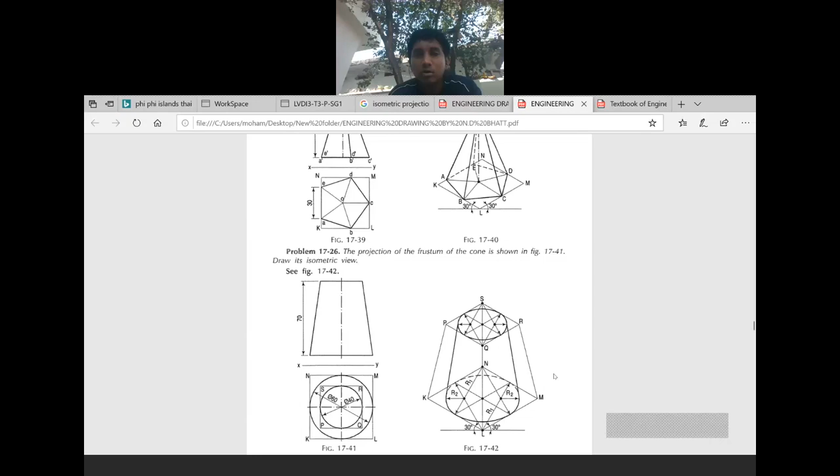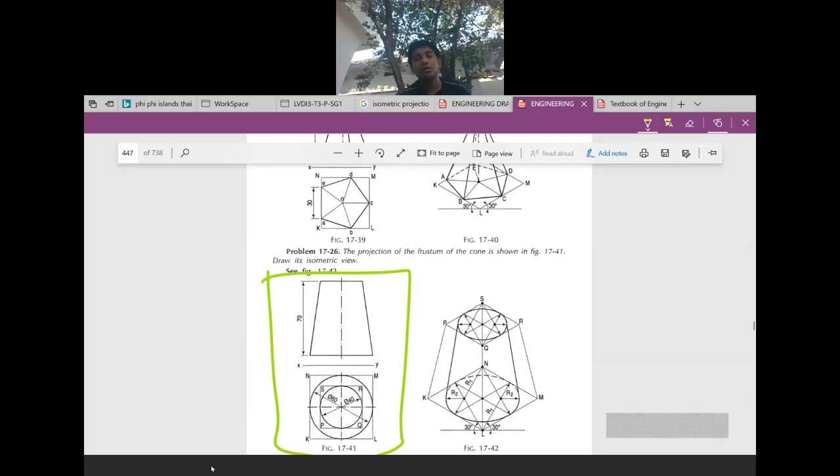Okay, here he has given a frustum of a cone. He has given the top diameter as 40, bottom diameter as 60 and height as 70 mm. Here you are going to draw the frustum of a cone. He has given the dimensions in this diagram. By seeing this diagram, you have to draw the isometric projection of this frustum of a cone. Top diameter 40, bottom diameter 60, height 70. How do you draw this one? Just see here.

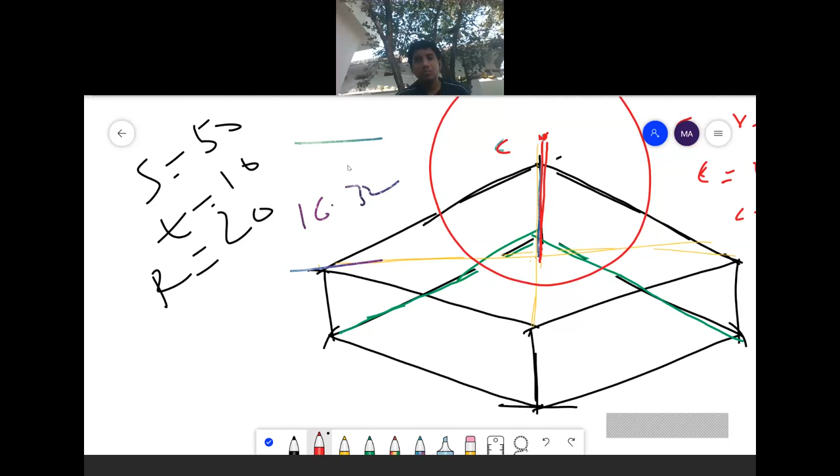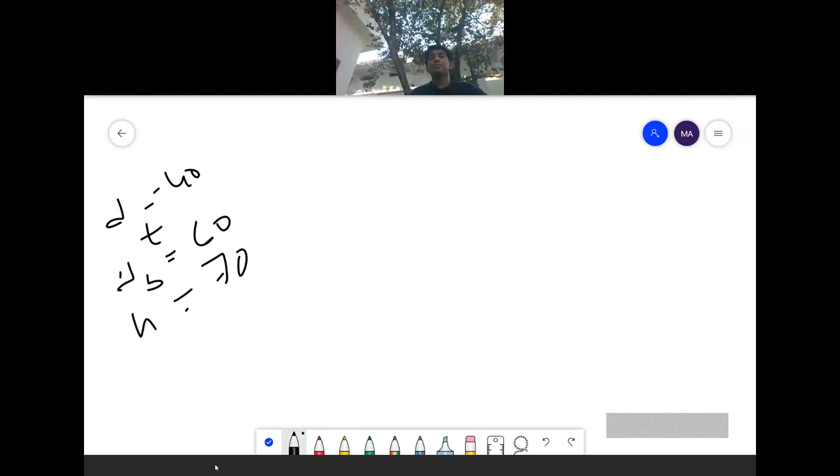So here he has given top diameter as 40, bottom diameter as 60 and height as 70. Bottom diameter as 60, height as 70. Understand? Given height as 70. So first you will consider

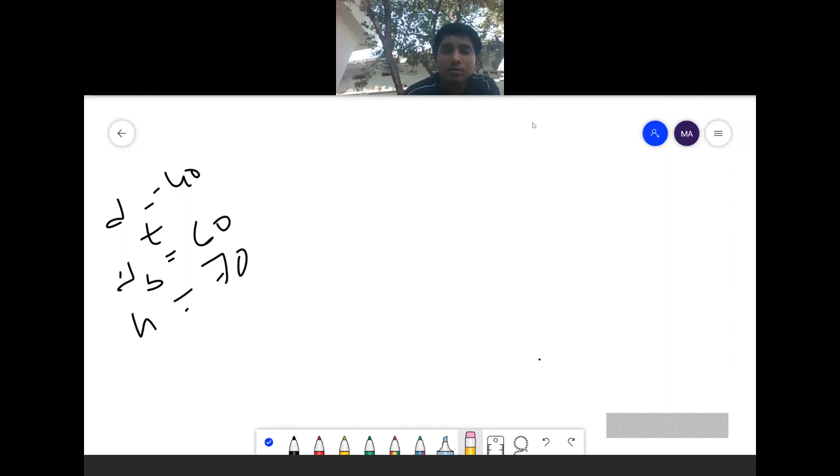you will draw 30 degrees this side, 30 degrees this side, and you'll cut 60 here, 60 here. From here we'll cut 60, 60. Join this one. You form a square with 60 mm. Then you'll mark the center points here, 30, 30, 30 here, 30 here, and 30 here. Then you are joining these two from the top vertex and similarly from the bottom vertex. Then you are drawing the circle.

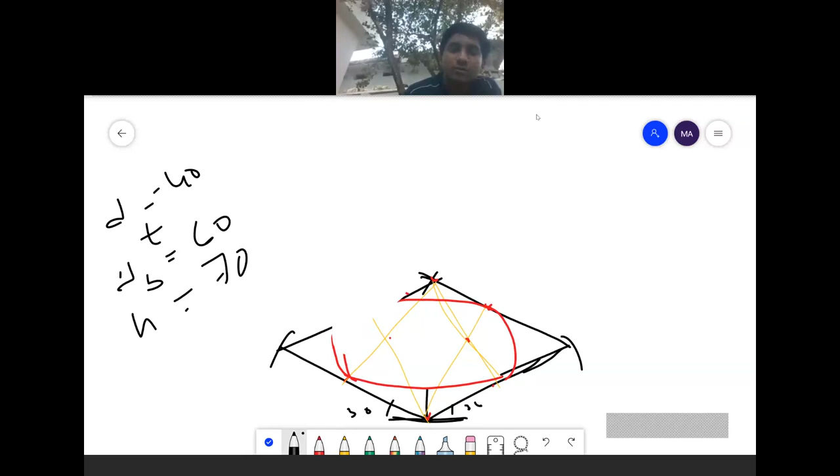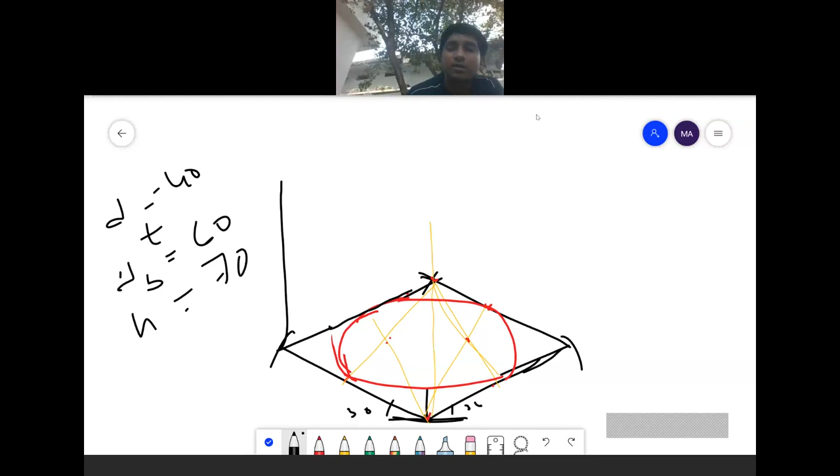You are taking this as center, this as a radius. You are drawing one circle. This as a center, this as a radius. This as a center, this as a radius. This as a center, this as a radius. Draw the circle. Okay, this as a center, this as a radius. Draw one circle. It will form a circle. After that, the given height is 70 mm. So we will extend this one to 70, this to 70.

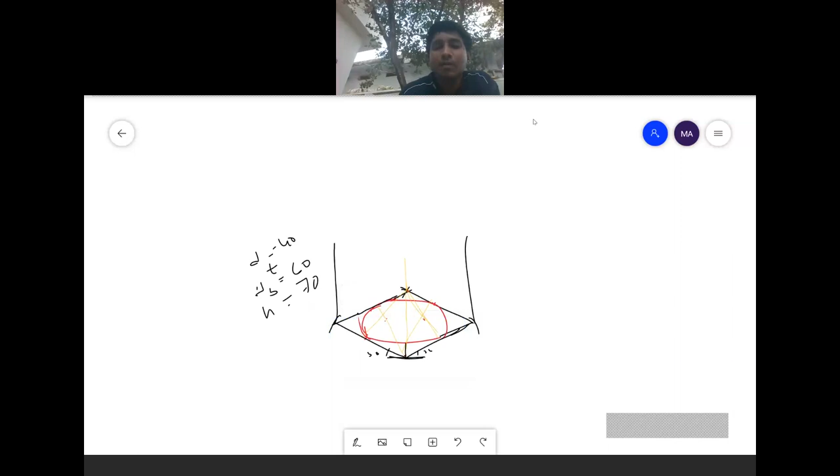Okay, then we'll extend this to 70.

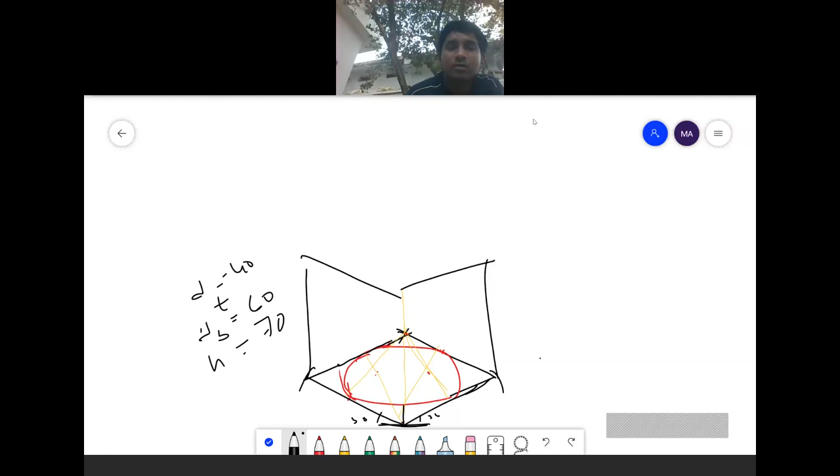Okay, then using this one, join this one and this one at this point, and from here also you will extend 70. Then you'll join this one and this one. It will form a square again. After that, how do you reduce this one? Here he has given a top diameter as 40. Understand? Here the bottom base diameter 60 you have drawn, top diameter is 40. You have to reduce this 60 square to 40 square.

For that, you mark the midpoints. First, you will mark the midpoints here. Join this midpoint and this midpoint. After that, the total distance here is how much? 60. 60 minus 40 is 20. 20 by 2 is 10. Understand? You will reduce 10 mm here, 10 mm here, 10 mm here, 10 mm here, and you will draw one line like this, one line like this, one line like this, one line like this.

Get another square. We'll draw with another pen. This one is the square we have. Understand? We are reducing this 60 square to 40 square. Now it is reduced to 40. After that, again you will use the 4 center method. You have centers here. Join this one. After that, you'll take this as center, this as radius arc, this as center, this as radius arc, this as center, this as radius arc, this as center, this as radius arc. Then you will join these two. This will be your frustum of a cone. Understand?

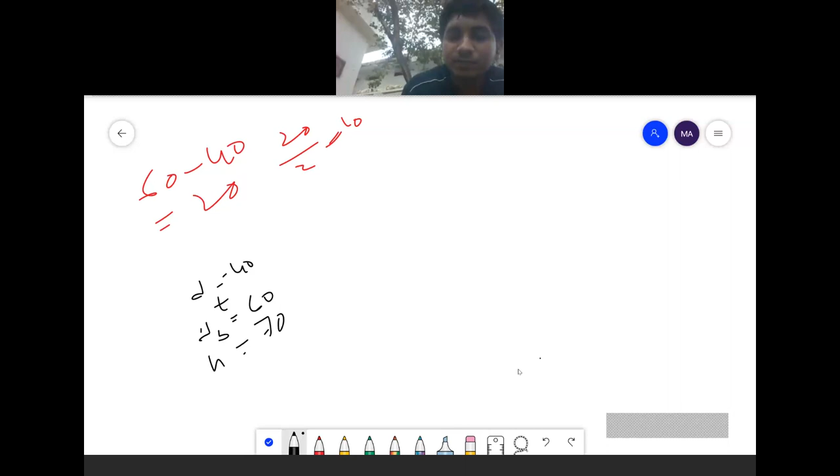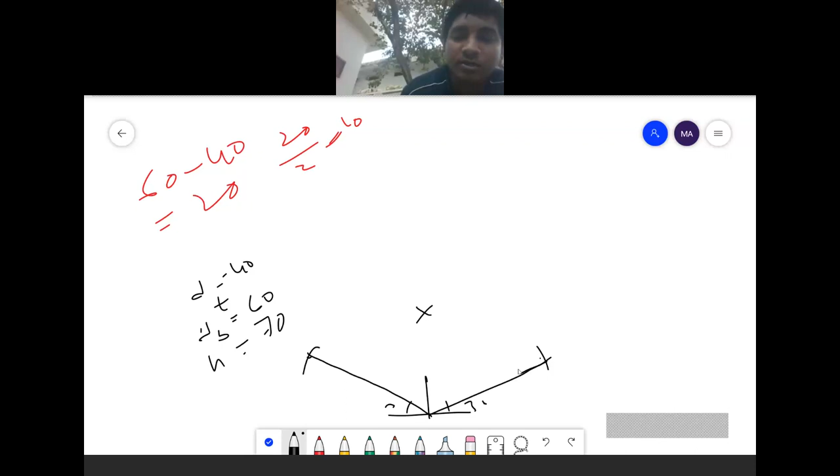drawn 30 degrees this side, 30 degrees this side. Then I have cut this side 60. I have drawn here 60. From here I am cutting 60. From here I am cutting 60. It will form a square. Then after that I am marking the midpoints at 30 mm. The midpoint of 60 is 30.

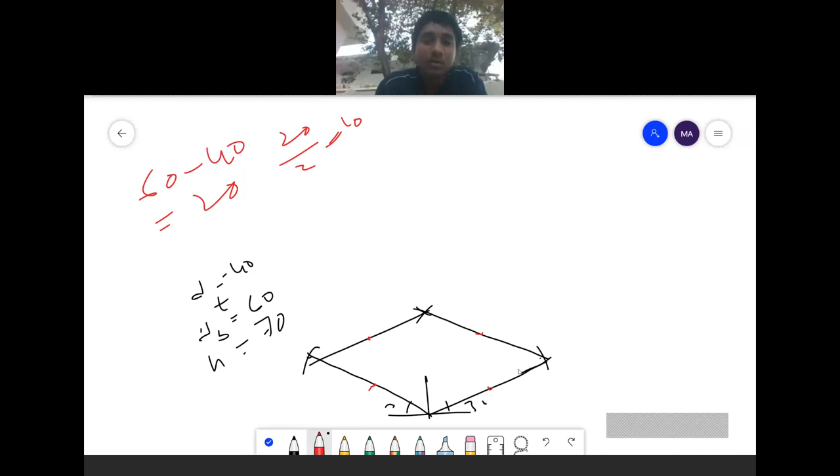After that I am joining from the top vertex to these bottom midpoints, and the bottom vertex to these midpoints. After that, I am drawing the circle, taking this as center, this as radius, taking this as center, this as radius, taking this as center, this as radius, taking this as center, this as radius.

After that, I am projecting this to 70 mm. Okay, height is 70. I'm projecting this line to 70 mm. Okay, then we'll get a line here from this point. From this point, I'm joining this one and this one. Okay, this one and this one.

Then I am extending 70. Height is 70. From the top of the square also, I am extending 70. Understand? Then I am joining this one. It will form a square. After that, I will mark the midpoints: here one midpoint at 30, here one midpoint at 30, one midpoint at 30. After drawing this, I am joining this midpoint line and this midpoint line.

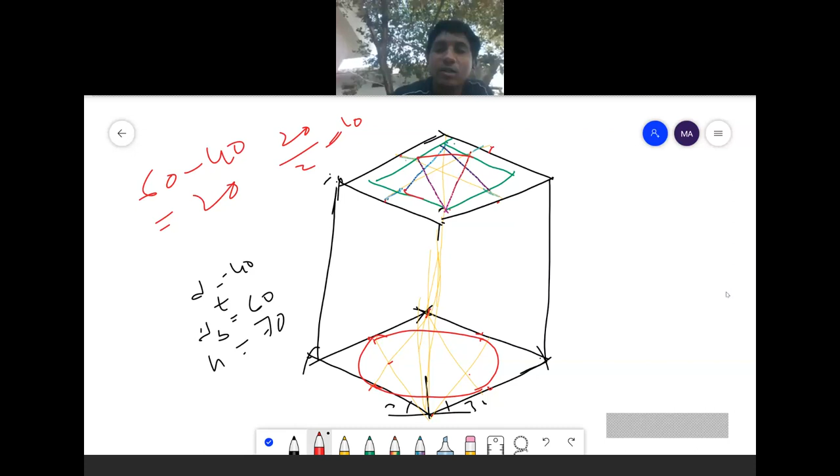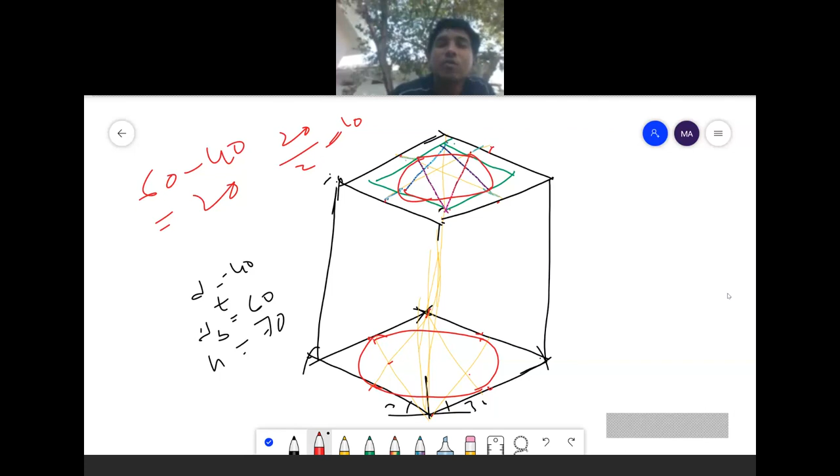It will form another square which is in green color. Then again you have midpoints for that square as well. So I am using the 4 center method to draw the circle, joining the top vertex to these lines and the bottom vertex to these lines. Again I am taking this as center, this as radius, drawing one arc, and the same for all four centers. It will form a circle, and I am joining these two circles.

This is the frustum of a cone. Understand? Just know how to reduce this one. You are subtracting how much distance you want. You have 60, you want 40 mm. So 60 minus 40 is 20. 20 mm you are reducing, so at two ends you are reducing 10 mm. At four sides marking 10 mm and joining all the lines. Then using the 4 center method, you are drawing the circle and joining the two circles.

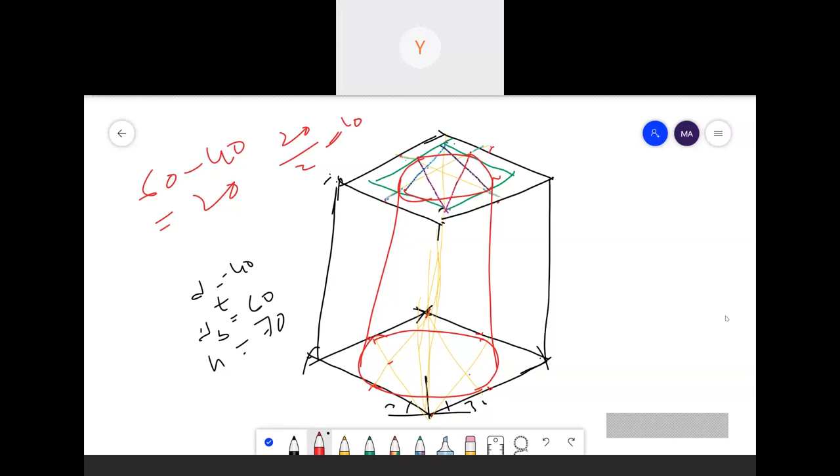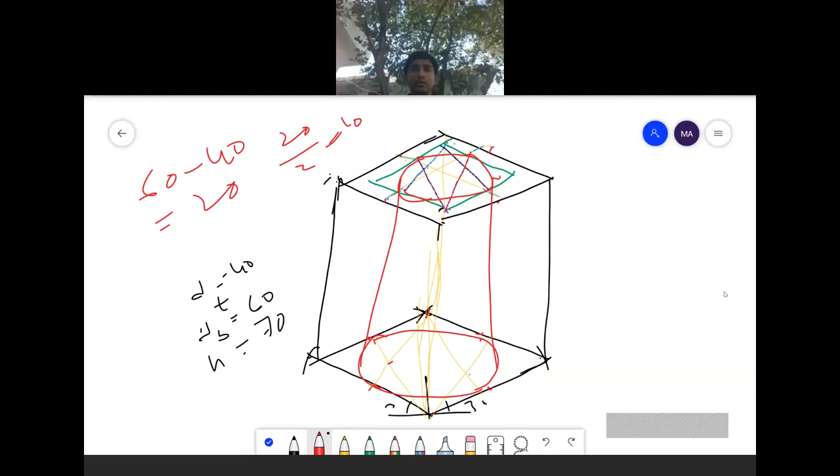Emma, do you have any doubts? No, sir. Okay, can we go to the next problem? Sir. Can we move to the next problem? Yes sir.

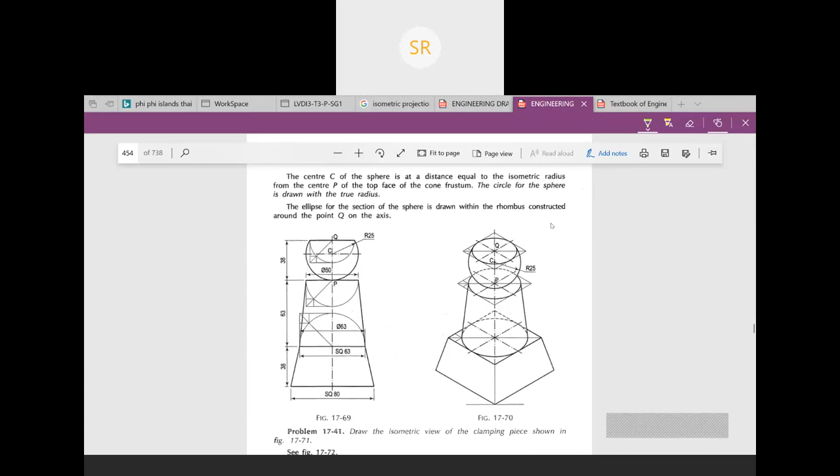Now next you are going to draw this one. The front view of three solids placed one above the other with their axis in a straight line is shown in a figure. Draw the isometric view of the arrangement. Here he has given a diagram like this. Here the side of the quadrilateral is 80. Here the side of a quadrilateral is 63 and height is 38.

And here the base diameter of this frustum of a cone is 63, height is 63, and top diameter is 50. The radius of this one is 25. Okay, and radius of this one is 25, and here it is a cut sphere at 38 mm. Understand, it is a cut sphere at 38 mm.

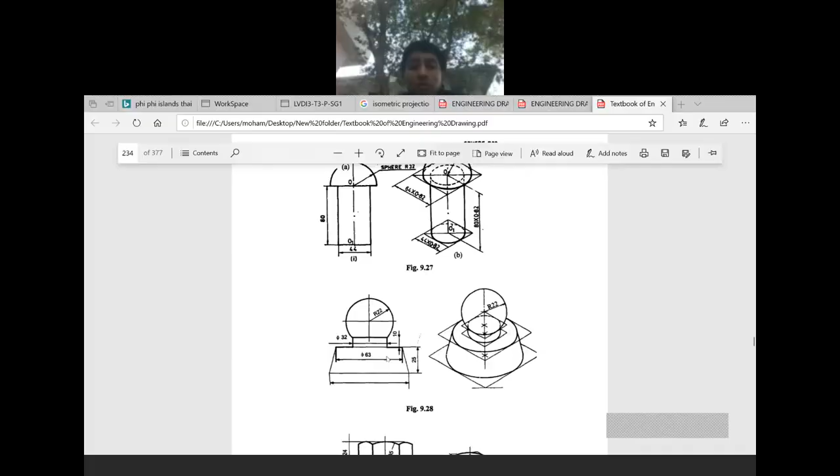Can we draw this one? Or else we will draw this one and then we will go to that problem. Here he has given one taper, one frustum of a cone whose top diameter is 63. Base diameter is not visible here. Take it as 80 mm, and height is 25, and here this circular plate diameter is 32, and this is 10 mm, and here the sphere is resting on it. Understand, we will draw this one, then we will move to that problem. Understand?

So how will you draw this one? Here you are taking this dimension as 80. Here he has given this dimension: base diameter is 80, top diameter is 63, height is 25. First you will draw this one, 80, 63, 25. This is for frustum of a cone. Base bottom diameter, top diameter, height is 25. It is 80. It is 63.

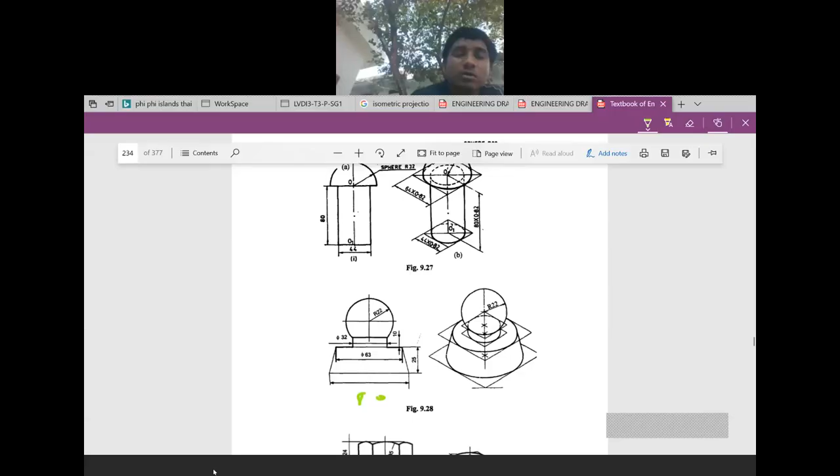Here he has given a width as how much? 10 mm. Height of this circular plate is 10 mm. I am extending it to 10 mm, using the same green pen to extend it 10 mm, 10 mm, 10 mm. Drawing another square, cut it here 10 mm. Then again I am marking the centers here.

Are you able to understand? Marking the centers here. Then I am joining the centers using light pen. Then I am drawing with the red pen again using 4 center method. One circle here, one arc here, one arc here, one arc here.

I'm joining these two. This one will be the circular plate. The circle will be like this. This circle will be like this. Okay, this one will be the hidden part. This part which I have indicated will be the hidden part in the circle. Here, this one will be hidden part. Understand?

After that, on the top you have a sphere. The radius of the sphere is 22. I have told you how to draw the sphere. Here, what will you do? You take the center of this one. From this center, mark the center C. C is equal to R into 0.816. What will be the radius here? 22.

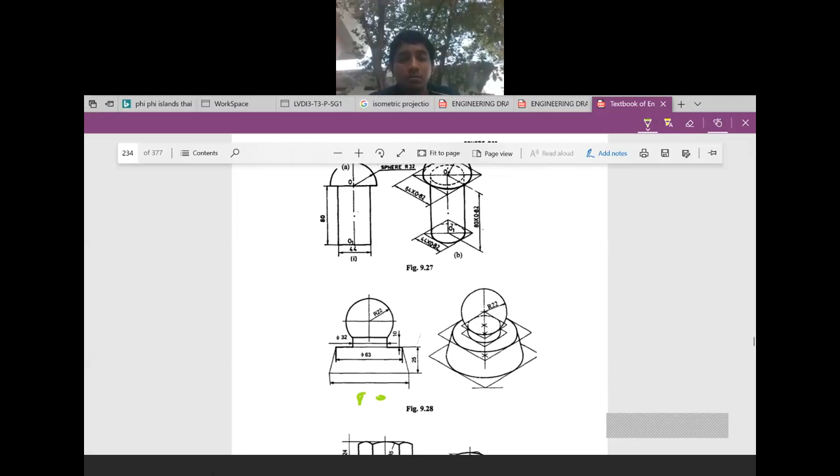Is it clear? Just you are reducing the dimensions here. Initially it is 80, you are reducing to 63. Again you are reducing 63 to how much? Next dimension is 32. You are reducing to 32. Okay. Understand? In this way you have to draw. How to reduce I have told you.

Is it clear? Yes, sir. Okay. Please draw it using your drawing instruments. Then you will get a clear idea about it.

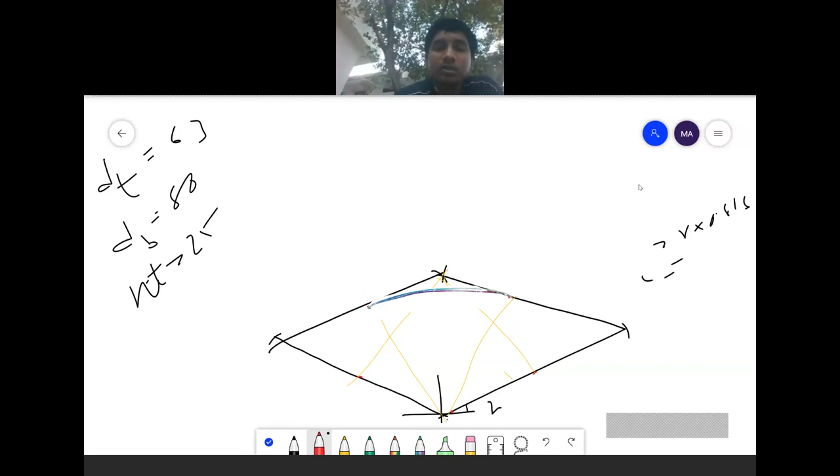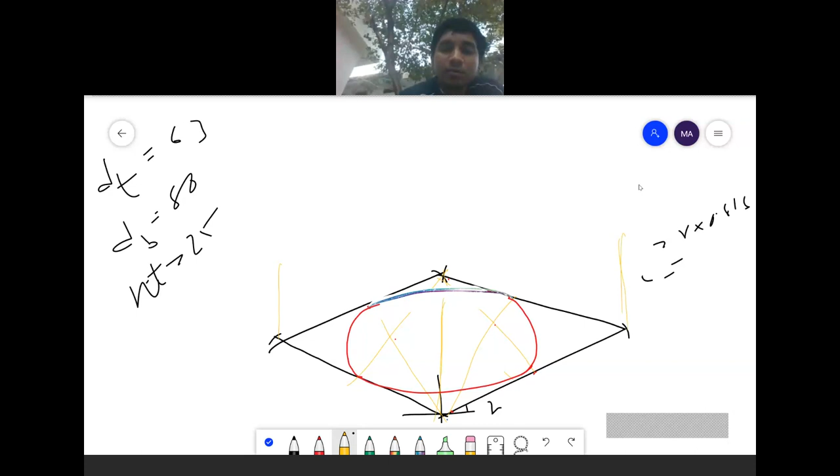Then I am using red pen here, taking this as center, this as radius, this as center, this as radius, this as center, this as radius. After that, I am extending it to 25 mm. Here 25 mm, here also 25, 25, and joining this one, extending this one also 25. Joining this one.

After that, the top diameter is 63. So first I am marking the centers here again, center points, and joining this line and this line. I am reducing to 63 means 80 minus 63 is 17, 17 means 8.5. So I am reducing 8.5 all the sides. Here I am reducing 8.5 mm, 8.5 mm, 8.5 mm, 8.5 mm, and drawing one line from here, one line from here, one line from here, one line from here.

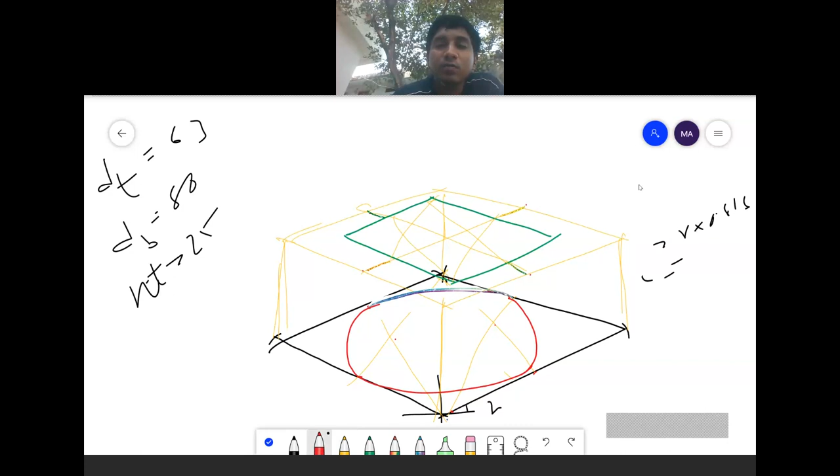We'll get one square. Then again using 4 center method, from top vertex to here, from bottom vertex to here, taking this one. Again I'm drawing one circle here. I'm joining these two.

After that, you have a circular disc or circular plate with a diameter of 32 and thickness of 10 mm. It is already 63. So I am reducing it to 32. 63 minus 32 is 31, 31 means 15.5 we have to reduce. I'm reducing all the sides to 15.5, 15.5, 15.5, 15.5. Then again I am drawing another rectangle here, like this, like this, like this, like this.

Again using 4 center method. I have the centers here, one midpoint here, one midpoint here, one midpoint here, one midpoint. Using 4 center method, joining this vertex to these points, this vertex to these points, and this as center, this as radius arc, this as center, this as radius arc, this as center, this as radius arc, this as center, this as radius arc.

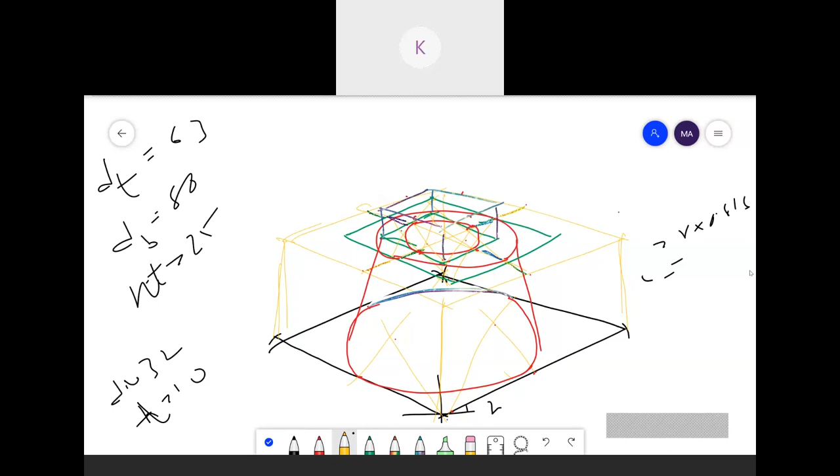Then using the 4 center method, from this center to... use green pen here, this center to this, from this center to this. Then I am drawing the circle here and joining these two. This is a circular plate. The red color one, which is visualizing, is a circular plate.

Okay, after that you'll take the center point here, this one, and joining this one midpoint. From this midpoint I'm extending one line, that is the center. The formula gives 17.6, some value, we'll get 17 point something. From that center, okay, we're taking the radius as 22.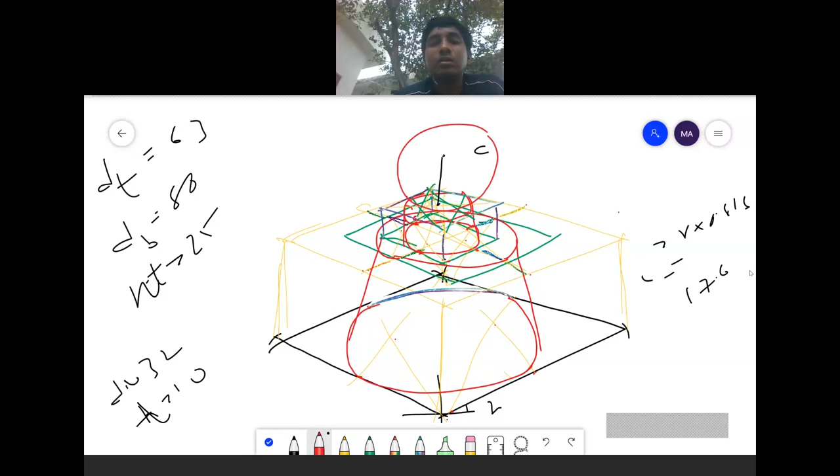Taking the radius on compass as 22, we're drawing one circle, that is a sphere. Understand? In this way you have to draw. For marking the center, you're joining these two, this line and this line. From that point you are extending it upwards and marking the center. From that center you are taking the radius as 22 and drawing the circle. Is it clear?

Any doubts? Is it clear?

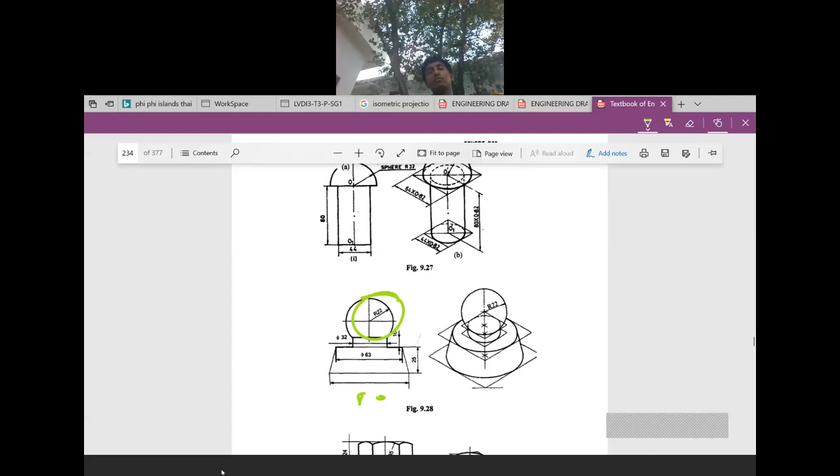With that radius, when you see here in the diagram, he has given the radius as 22. Understand? In the diagram he has given the radius as 22.

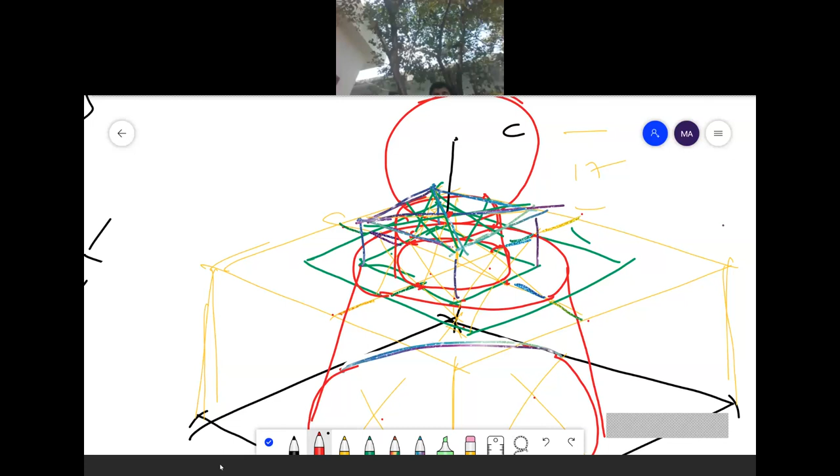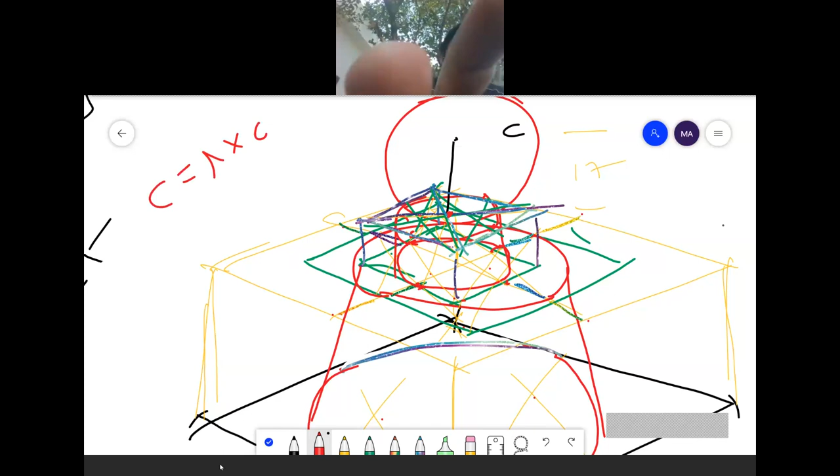Understand? R is nothing but radius here. 0.816 is the isometric scale factor. We call it 9/11, or else 0.816.

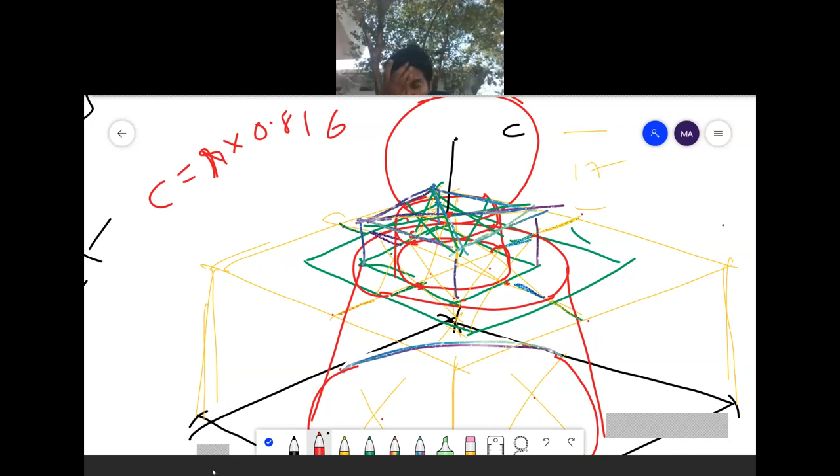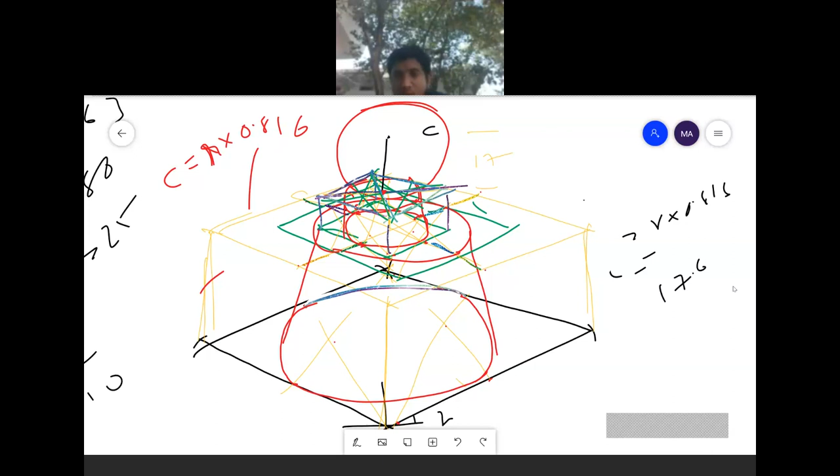Now can we move to the next problem? Can we move to the next problem? Yes, sir. Okay, we are going to do this problem.

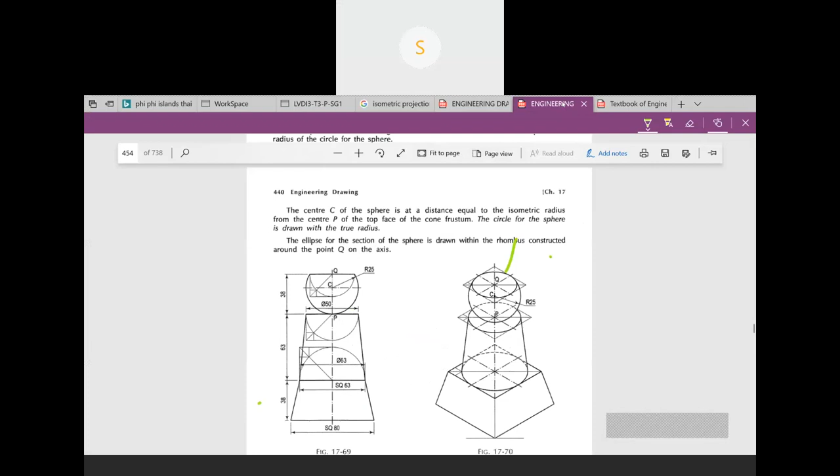Listen carefully. Here he has given the side of a square, this one, a square pyramid frustum. Here it is, 80 mm. The bottom side has 80 mm, top side has 63, and here for this cone frustum, bottom diameter is 63 and top diameter is 50. And here he has given like this. Okay.

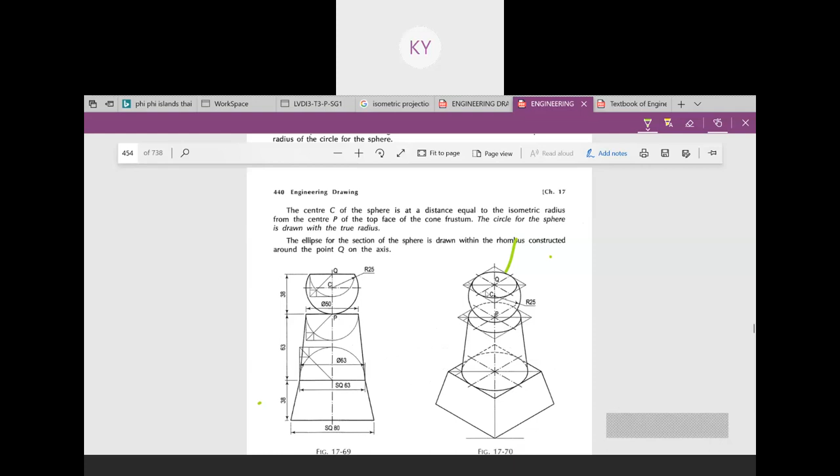So how to draw? I will explain. So first, he has given bottom side as 80, top side as 63, and 38. 80, 63 and 38: here it is bottom side, top side, and height. So now listen carefully.

I'm taking a line here, drawing 30 degrees inclination. This side 30, this side 30. Cutting 80 here. From here I am cutting 80. Okay, after that I am extending it to 38, 38, 38. From here also I am extending 38. I'm joining these things. After that, the top is 63, so I am marking the center points.

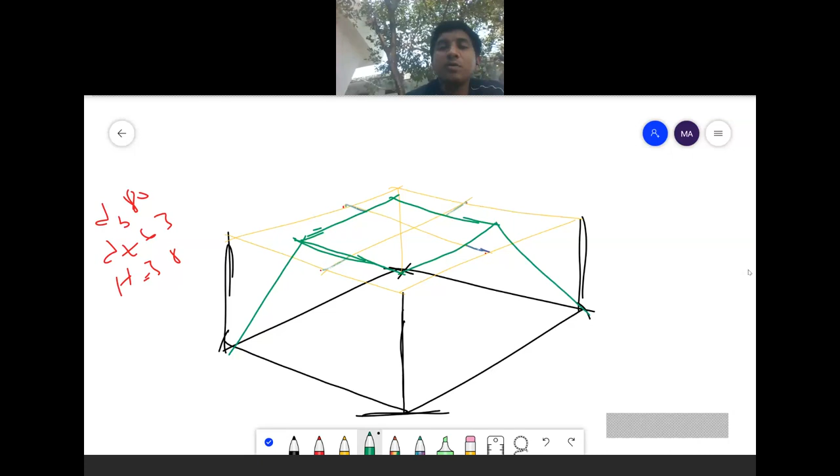Okay. Then I am drawing, okay. Then I am joining these two. This one will be your frustum of a square pyramid. This line will be the hidden line which will not be visible.

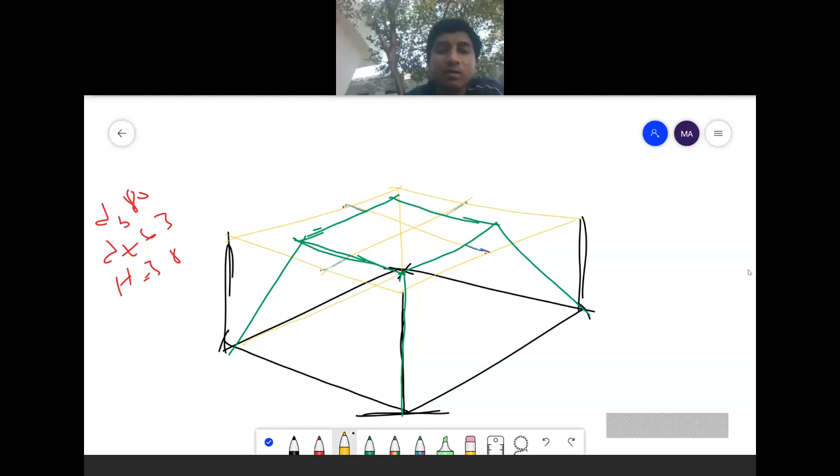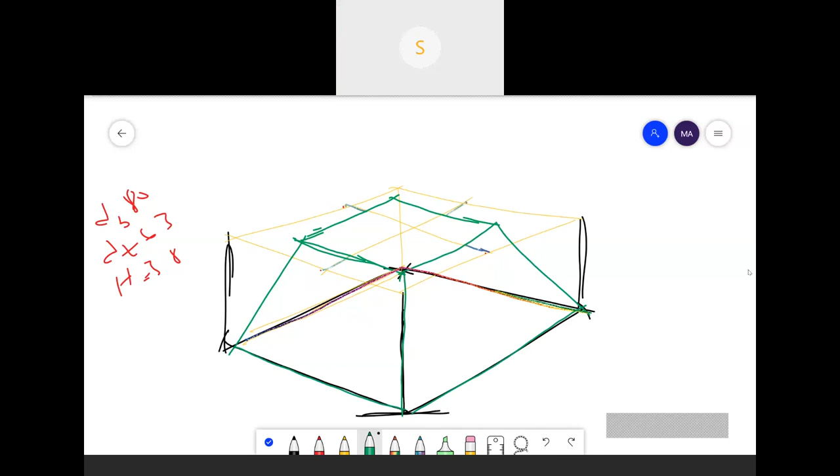I will draw with this pen. This line will be a hidden line which is not visible. The visible part which I have drawn is with the green pen. Understand? This one will be your frustum of a square pyramid. After that, this frustum of square pyramid is over.

Again on the top you have a frustum of a cone. Here base is 63, top is 50. Already you have a 63 here. So it is easy that I will mark. You have the centers as well using the 4 center method.

I am drawing one circle here. Take this as center, this as radius, this as center, this as radius, this as center, this as radius. I have drawn one circle and I am extending this one to the given dimension. What is the given dimension? 63. Here it is.

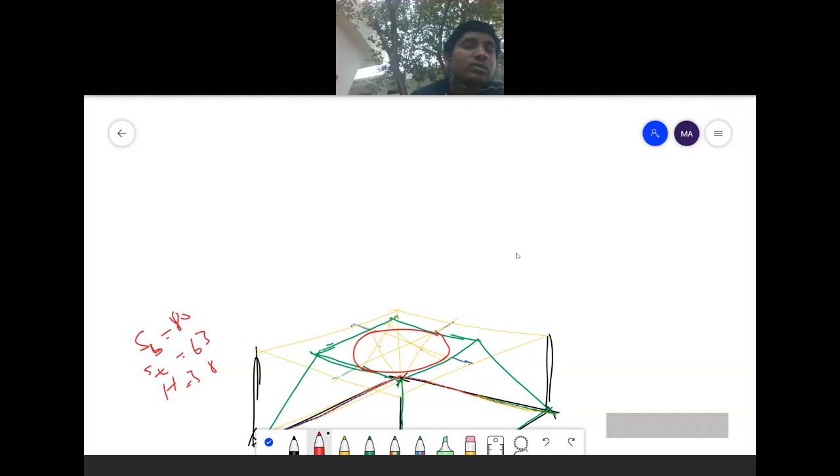This is not. This one is side, bottom side, top side 63. This one is top diameter 50, bottom diameter 63, height is how much? Given height as 63. So I am extending this one to 63, this one to 63, this one to 63.

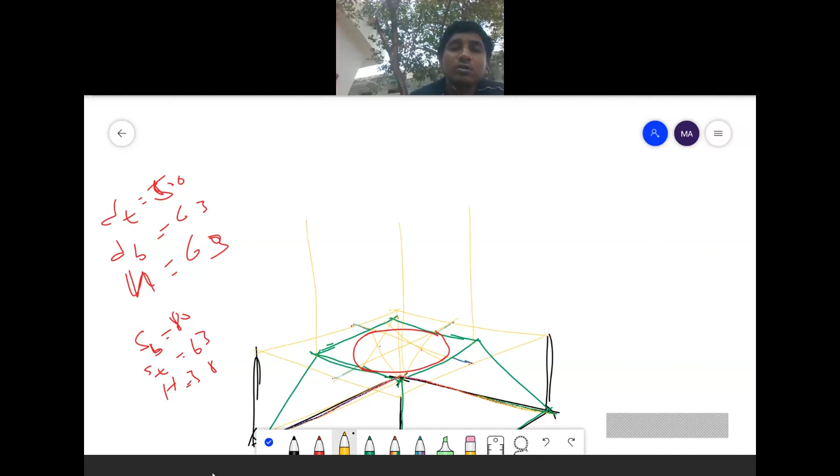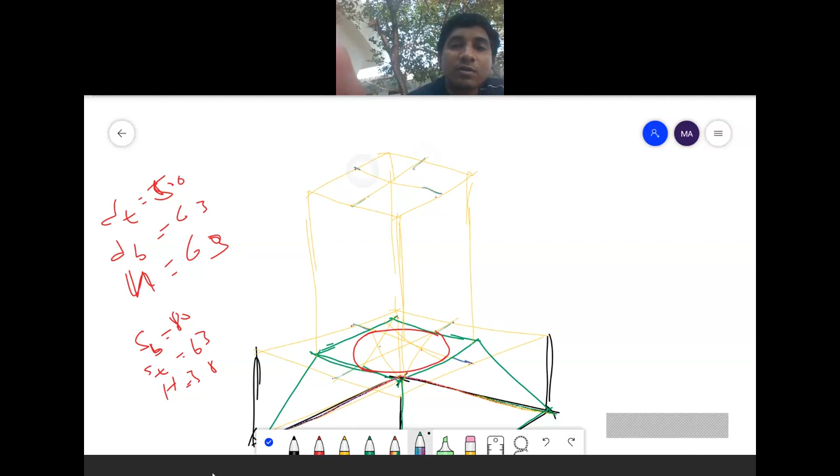I'm constructing a square. From here also I am extending 63, constructing a square. After that, top is 50. 63 minus 50 is 13. Half of 13 means 6.5. So I am marking the center points here. I'm reducing 6.5 here, 6.5 here, 6.5 here, 6.5 here, and I am using a red pen to draw this one.

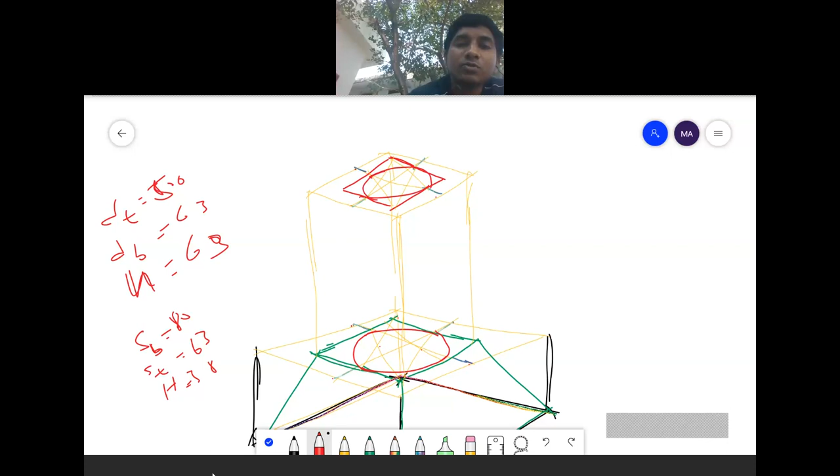Common square. Again using the 4 center method, draw one circle. Join this one. Okay. After that you have the sphere. You know how to draw the sphere. First you have to mark the center of the sphere. The center of the sphere will be marked with a formula, center C.

Here the given radius is how much? 25 is given as the radius. So for the 25 radius, we have a formula: C is equal to R into 0.816. That is 25 into 0.816. Use your calculator to calculate it. 25 into 0.816, the value is 20.4.

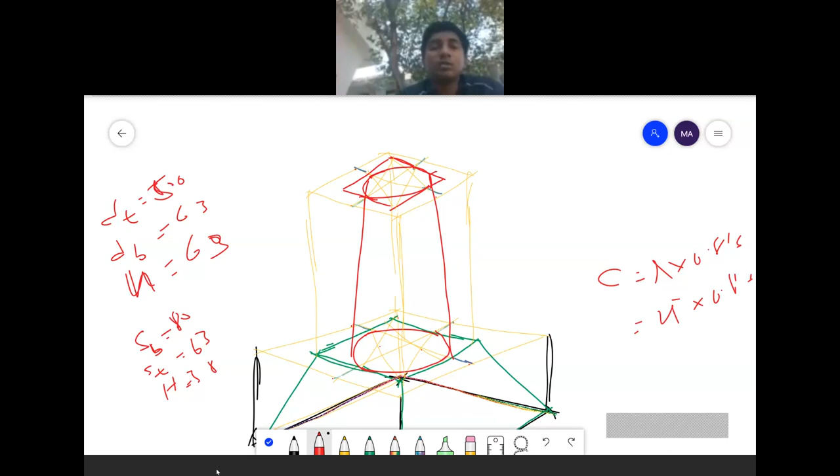What I am doing is, from here I am taking the center, marking center C at 20.4, and I am taking 25 as the radius. I'm drawing one circle here. After drawing this circle, this is the center point you have.

Okay, here he has given a cut sphere. Understand? Radius is 25, a cut sphere which is cut at 38 mm from the base. So what will you do? From where the circle is coming, from there you will measure 38 mm.

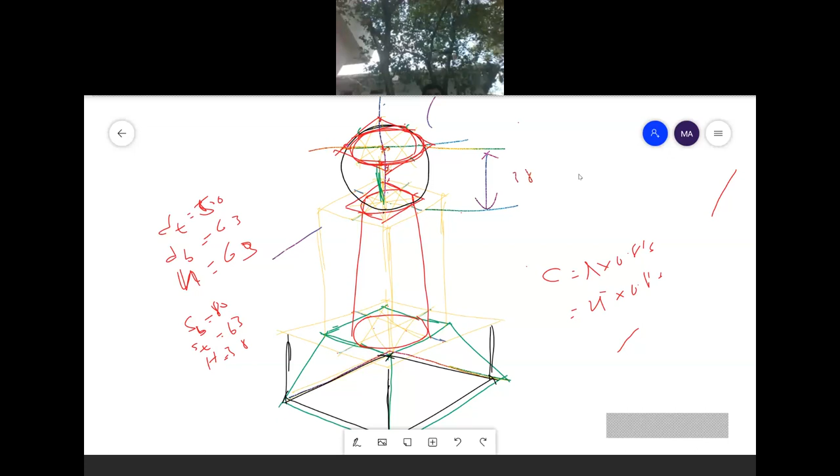Just see. I will explain here clearly how to draw it. You have a square like this. What I am doing is I'm marking the center line. From the center line, I'm extending the center C. I have calculated the center C as 20.4. Okay, from that center C, I've drawn one circle.

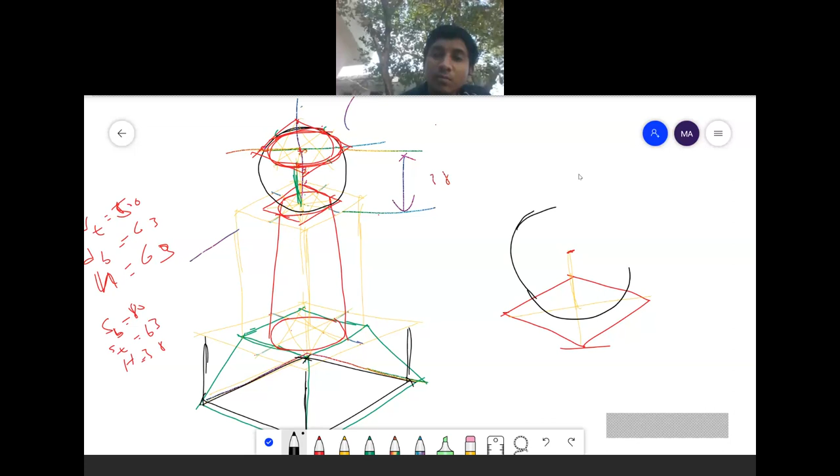Radius as 25. Okay, radius of 25, I've drawn one circle. After drawing this one, the sphere is cut at 38 mm. So I have taken 38 from here. I have marked one point here, 38. At that point, I'm drawing one line like this. Okay, another line like this.

Another line like this. And I have measured 12.5 mm this side, 12.5 mm this side, 12.5 mm this side, 12.5 mm this side. Okay, I have constructed one square. After constructing this square, I marked the midpoints of this square to construct a circle inside it. I marked the midpoints. Again, I have joined from top vertex to here, bottom vertex to here, and I have used this as center, this as a radius.

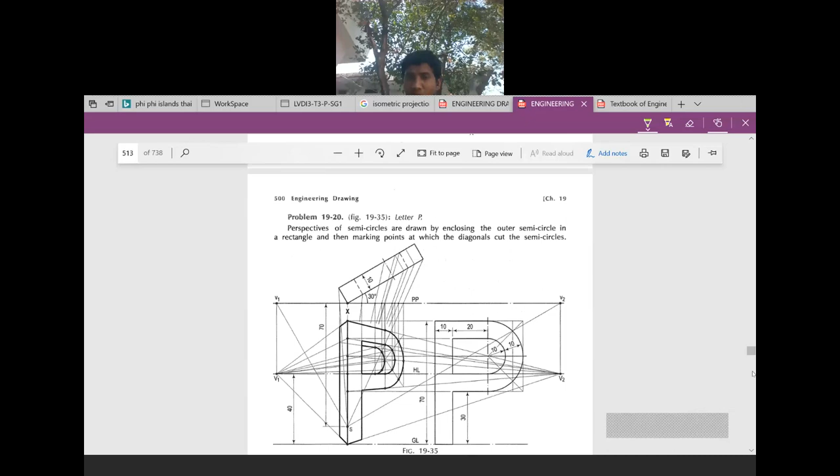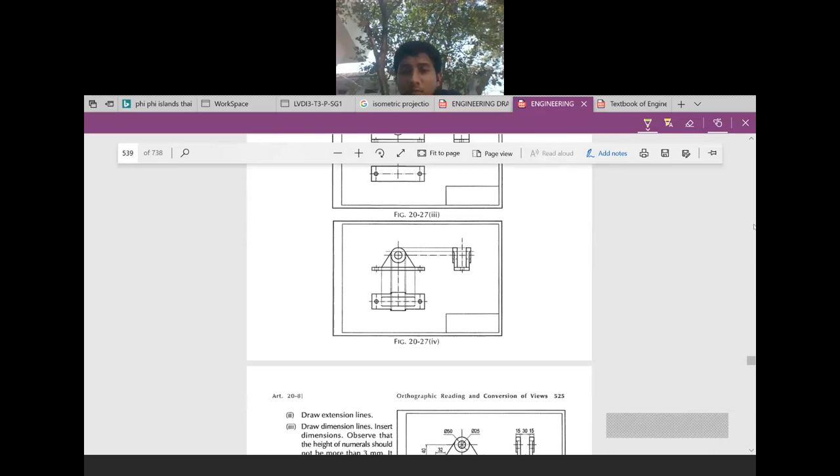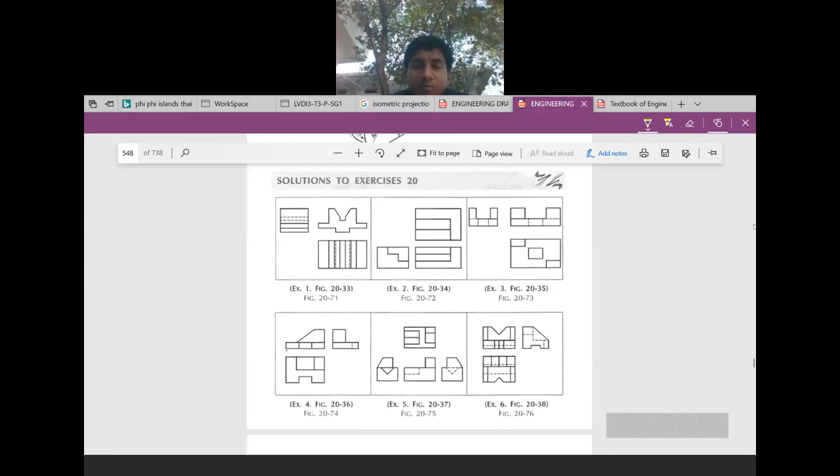Here you have problems. You can go through it, from page number 527 to 534. You can do the problems here. Here solutions are given as well for all the problems. These are the problems of orthographic projections. You can practice it, page number 527 to 534.

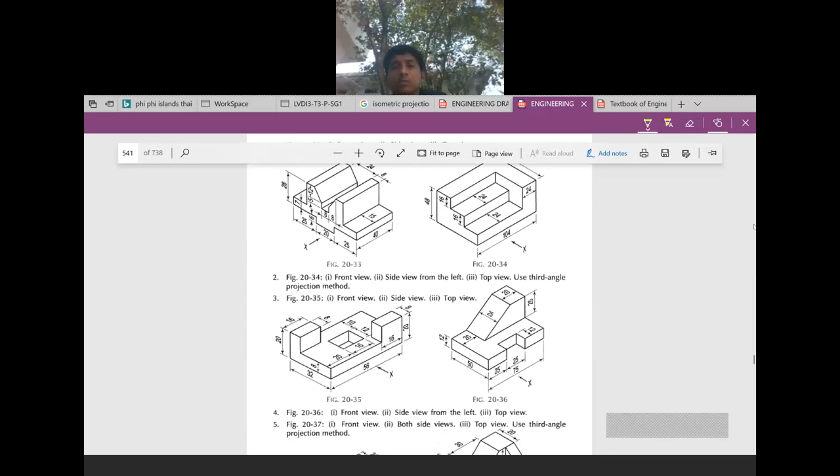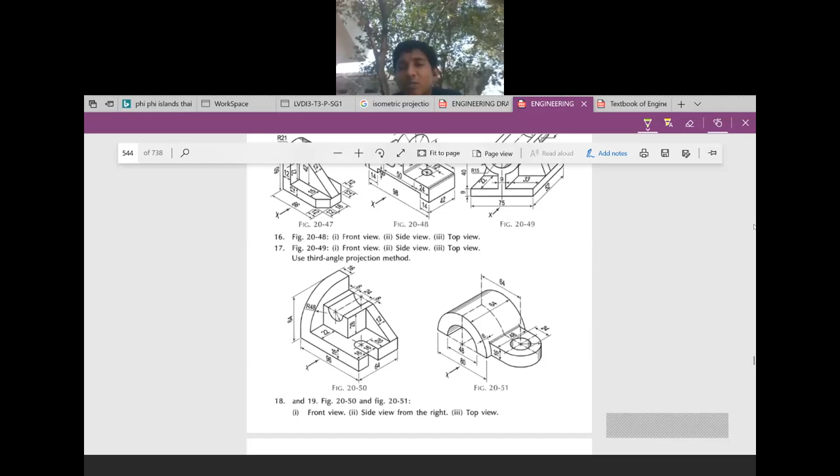Okay, I will send you the details through WhatsApp. Just go through it. Here he has given all the diagrams in orthographic projections. You practice these diagrams. You can solve any problem. In the examination also, they'll ask the problems from this textbook only. So go through all these diagrams to solve all the orthographic projections. Here he has given all the dimensions and everything. Just go through it. If you have any doubt, you can ask me in the next class.